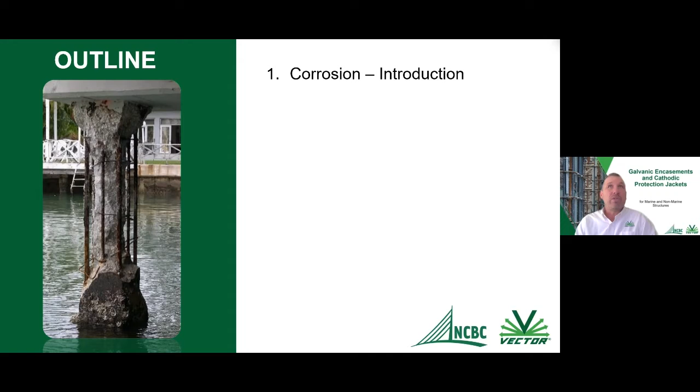So for the outline, I'm just going to do a brief introduction to corrosion, talk briefly about how it works, and why our reinforcing steel, or all the steel that we use in our structures, actually corrodes. And then I'm going to move on to some of the past solutions for pile protection, which will include a variety of different things that I'm sure a number of you have come across in the past, and how basically the majority of these solutions just did not address that corrosion problem.

Another thing that I'm going to talk about is your environmental conditions, or your exposure conditions. Depending upon which section or which part of your pile is in a certain environment, this is actually going to dictate basically what kind of corrosion, or the amount of aggressive corrosion, that you're going to have on your pile or on your structure. So everything from a submerged section all the way up to an atmospheric section - there's chlorides present there, but there's just varying different amounts of oxygen and moisture that are present as well.

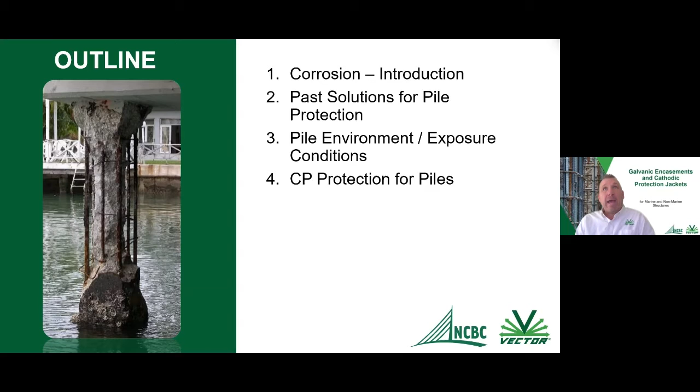Then I'm going to go into a number of the different types of cathodic protection systems that are available for all the different types of piles that are out there, everything from steel piles all the way to concrete piles. Along with this, I'm just going to talk briefly about some of the advancements or improvements for bulk anodes that are used on the underwater or submerged portion for these cathodic protection jackets.

Then this is going to bring me on to some of the sheet pile protection. So obviously we have sheet pile walls out there that typically have a coating - some of them don't have coatings on them - and we're going to go through some of the available options in terms of CP that's available for the sheet pile.

And then lastly, we're going to get into encasements in non-marine environments. So all of the areas where you basically have corrosion on your structures, but we're going to be doing an encasement on it where you actually do not have access to, or it is not in the submerged portion of a marine environment as well. So I'm going to move on here to the corrosion cycle.

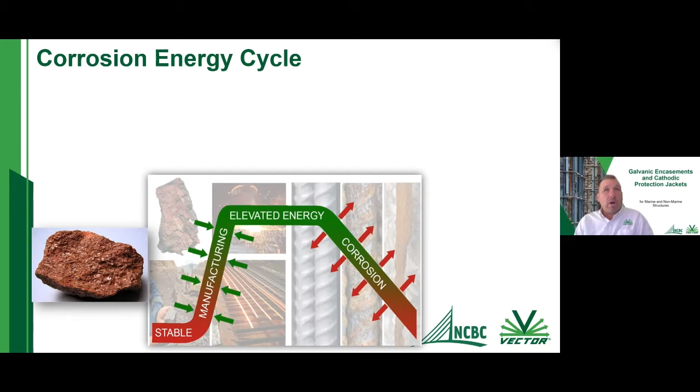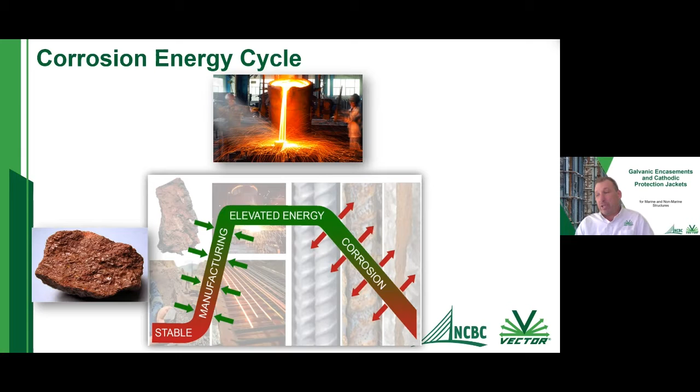This is a good slide because it demonstrates why reinforcing steel in our structures actually wants to corrode. In the beginning, we get iron ore out of the ground - it's super stable there. We mine it and pull it out because we want to make iron out of it. To do this, we push a huge amount of energy into the iron ore, basically elevating it into a material, into iron. Then we take this iron and put it into our structures, whether embedded in concrete or as exposed steel. But all this iron wants to do is go back to the original form it was in the ground - it just wants to go back to rust. So this is the corrosion process happening within our structures.

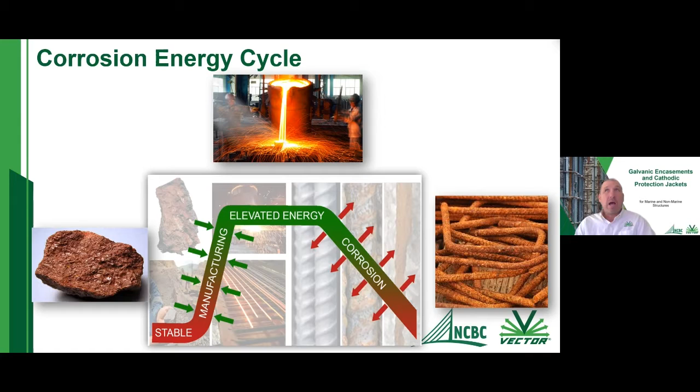I'm going to go through a brief slide on the corrosion process of steel in reinforced concrete. This corrosion process is an electrochemical reaction, and it requires a number of things to occur.

A good way to remember this is ACME. A stands for anode, or the section loss - this is the area where we actually have the rusting or corrosion of our reinforcing steel. That's our anode portion, the portion corroding. You can see it on the right side of the slide.

For the letter C, we need our cathode - this is the area that is not going to corrode, or is essentially protected. You can also see it here on the right side.

We have our cathode and our anode, but now we have to have basically a metallic path, a metal. If you look here, you can see there's a number of bars and stirrups, and there will be tie wires. You have to have this metal or metallic path to complete the circuit between the cathode and the anode - it has to be electrically connected. So that's what we have there.

Lastly, we have E, which is our electrolyte. The electrolyte is basically just the medium in which our reinforcing steel is embedded. In this example, our rebar is embedded in concrete, so the concrete is our electrolyte. If you had a steel tank buried in soil, the soil would be your electrolyte, and the same goes for seawater - if you put sheet pile or a concrete reinforced pile in water, the water becomes your electrolyte as well.

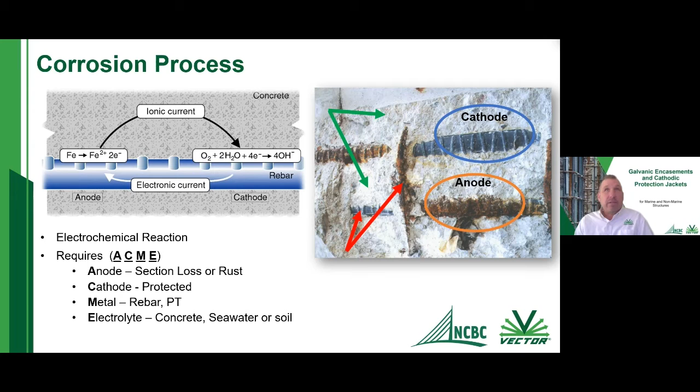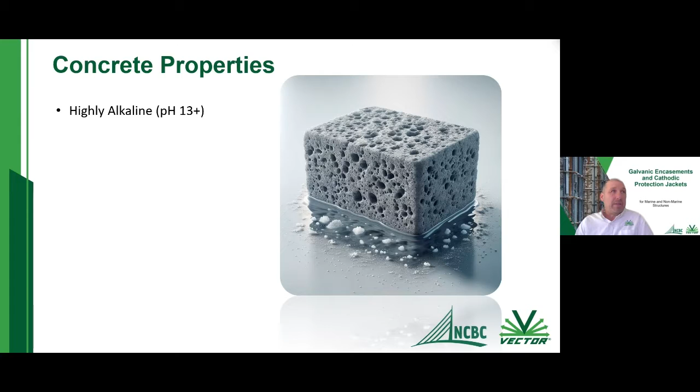Moving on, everybody's fairly familiar with concrete properties, but it's very high in pH. When we first pour or build a structure, the concrete has a very high pH. Then as it gets exposed to the environment, the pH can decrease. It's also very hard, but also very porous - if you pour water or any liquid on concrete, you can see it getting soaked up into the concrete. It's great in compression but poor in tension, and because of that, it requires reinforcement. That's the whole reason we put rebar or any reinforcement into our concrete - because of that poor tension.

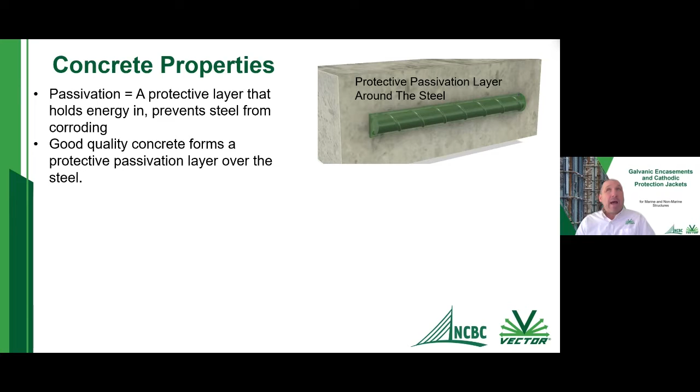So good quality concrete, you basically get a good protective layer or passivation layer around your reinforcing steel. And now what ends up happening is actually over time, this protective layer can be disrupted or taken away. There's a number of different things that do it, but in our type of work, it's typically carbon dioxide or CO2, or chlorides.

So especially in a marine environment, you can get chlorides, or for an old structure, it can become carbonated over time if it's very old. But basically both of these will break down that passive oxide layer, and it's going to allow your reinforcing steel to start to corrode.

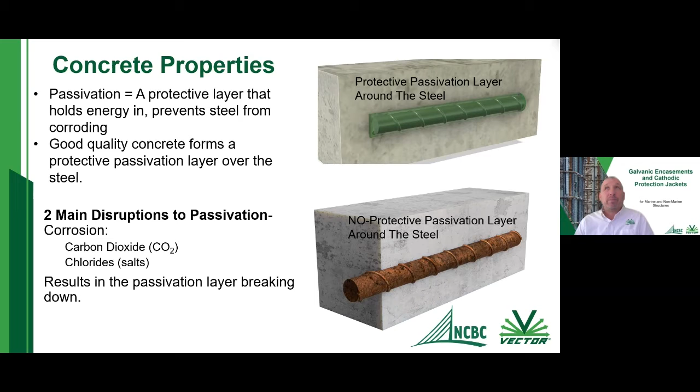So now I'm going to move on to one of the other things I want to briefly talk about, which is brackish water and corrosion. In a marine environment, you can be exposed to brackish water, and the brackish water may not have very high levels of chlorides in it. It may just have some moderate levels, nothing near the point that would cause a huge corrosion issue for exposed steel.

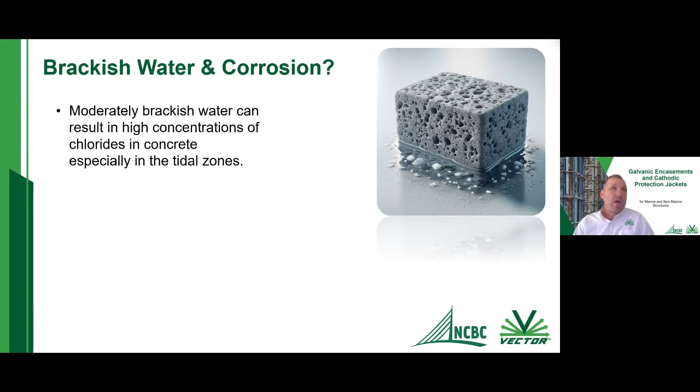But what ends up happening is, because the concrete is very porous, this brackish water basically goes in and out of the concrete surface, and due to this repeated wetting and drying cycle, the chlorides remain in the concrete. So when it dries again and re-wets, you can actually have very, very high elevated levels of chlorides in your concrete, even in brackish water where you don't have very high salt concentrations.

So some of you may have come across this, where you're out in a brackish water area where there's not a lot of chlorides in the water, but you can still see significant corrosion, especially on reinforced concrete structures, due to the concrete basically absorbing that water over and over.

So chloride-induced corrosion, here's a few pictures of them. Obviously it breaks up that passive oxide layer, like I mentioned. There's a number of areas or sources for these chlorides. Obviously the marine environment that we're going to be talking about here is a big one for us, and there's a number of other areas you can get chlorides from as well.

So one of the things to think about is chlorides are never actually consumed in this process, so they're always there to continue that corrosion process or corrosion cycle. They never get consumed, so they're always there regardless.

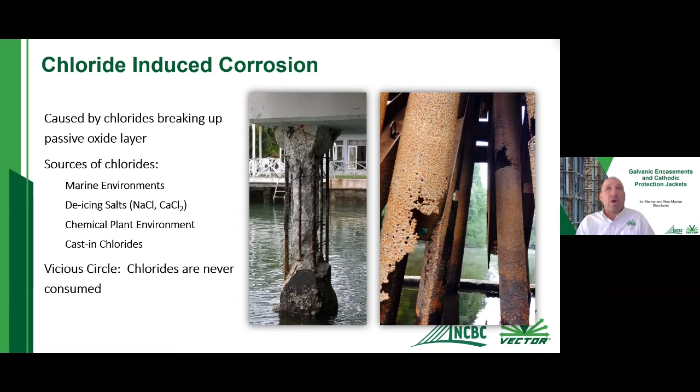The next thing I'm going to move on to is pile exposure conditions. I mentioned this in the introduction, and it's going to dictate basically what type of cathodic protection system you're going to use on the structure.

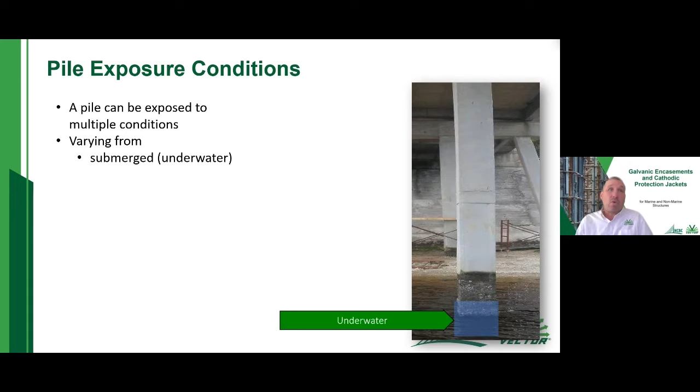So a pile can be exposed to a variety of different environments, and they can vary anywhere from our submerged or underwater section all the way up to our tidal zone, or our regular wetting zone. This is where you have your tides constantly going up and down multiple times during the day, so your structure's getting wet and dry at the same time.

And then we're going to move up into our periodic, or kind of our splash zone. So this is either storm events, wind, or it could also be boat traffic. So this area here also receives fairly significant wetting and so forth as well.

And then from this, we're going to move up onto the pile, into our dry area or atmospheric area. This is the area where, especially if you go to a beach, you can see waves crashing and basically a mist of chlorides floating in the air. This is the part of the structure that actually gets exposed to this as well.

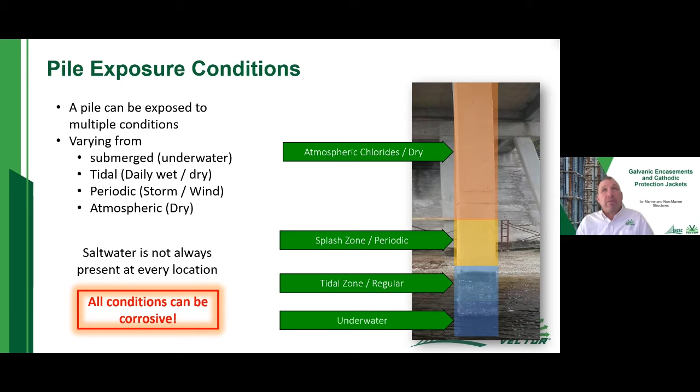So one of the things to think of is even though the pile is not exposed directly to water, it still can experience corrosion even higher up on these dry or atmospheric areas. So basically everywhere on this pile, corrosion can occur. The most extreme portions are going to be the tidal zone and that splash zone right in the middle of the pile, where you have a lot of chlorides and it's wet all of the time.

So now I'm going to just move on to some of the past strategies that have been used to basically prevent corrosion from occurring on steel piles, or to extend their lifespan. So the first one is uncoated steel, right?

So you have a certain thickness of steel, and you know it's going to corrode. Whether it's pipe piles or sheet pile walls, if it's just uncoated steel left exposed to the elements, it's going to corrode.

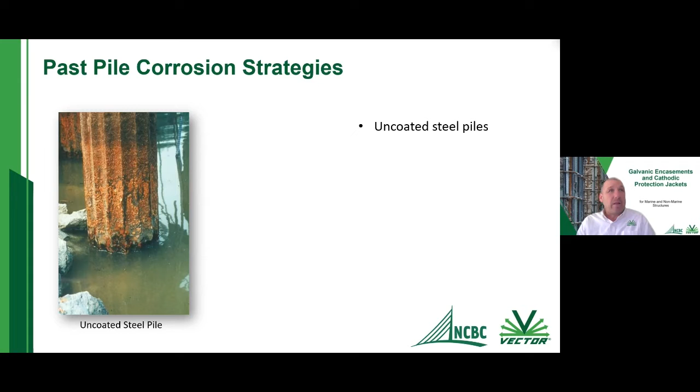Then there's coated steel piles as well, so you can put coatings on your steel piles or sheet pile walls. But what ends up happening is you get coating failures, whether from holidays in the coating application or during installation, since the sheet pile or pipe piles can be damaged through driving operations and just bringing them out to site. So you get these coating failures, and then corrosion occurs.

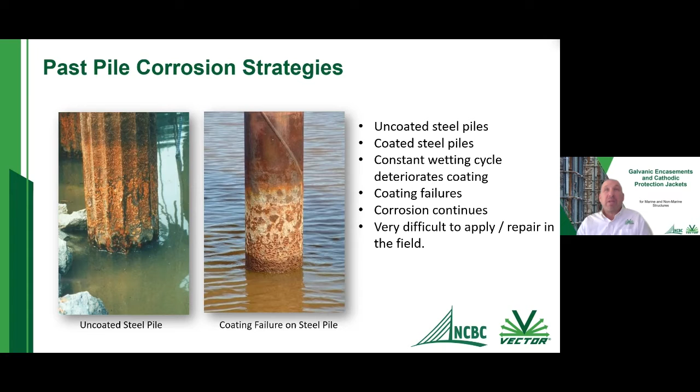So you have corrosion occurring, and this type of corrosion is very difficult to repair. How do you come in and repair this coating? You'd have to come in with some sort of cofferdam or wrap, and you still have all the salt water and chlorides available for corrosion to occur.

Another one is the fiberglass jacket. It's a fiberglass jacket placed around a pile, filled with an epoxy grout. The hope is that with the fiberglass jacket and epoxy grout, you'd reduce the amount of chlorides and oxygen getting to that portion of the pile. But what ends up happening is moisture is still present, chlorides are still in there, and corrosion actually occurs behind that jacket. It's very difficult to see any damage behind it until it gets extremely bad.

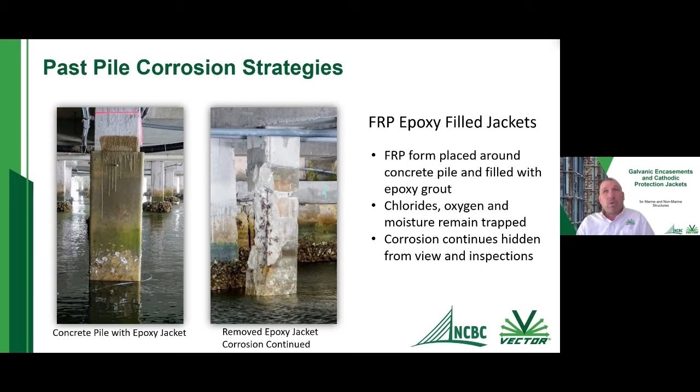And the bad thing about it is corrosion continues behind this jacket, and it's not visible when you come out to do an inspection. It can be fairly aggressive behind there before you actually see any sort of damage or delaminations to this fiberglass jacket as well.

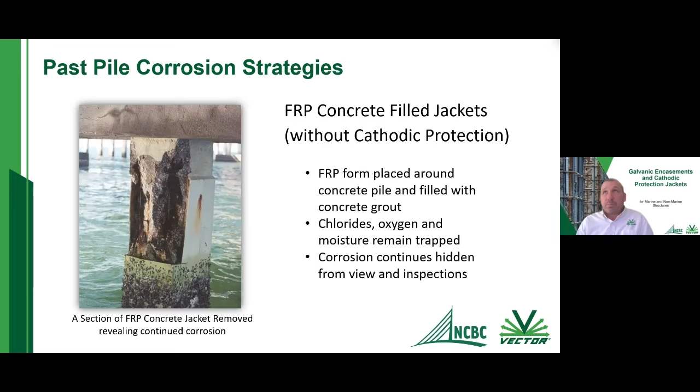So jacketing is obviously the most common repair strategy that we come across when we're out there. I showed you just a few of these here, some of the past kind of jackets that were done without any sort of cathodic protection.

There have been a number of studies done on concrete jackets placed around piles, and they found that corrosion still occurs behind these jacket systems without cathodic protection. So a number of owners, entities, and states have now included in any jacket or jacketing overbuild situation a requirement for cathodic protection, since this corrosion continues otherwise.

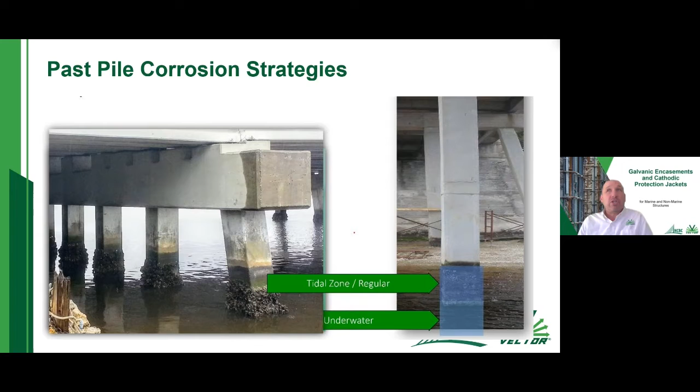With that, a cathodic protection jacket system was developed for the underwater portion, or this tidal zone portion I talked about on the previous slides. We have a lot of salt water, so we have a lot of low resistivity in here. It's very, very easy for corrosion to occur, and once it happens, it continues at a high rate as well.

One of the CP jackets that was actually developed, Florida DOT in the 90s developed an expanded zinc mesh jacket that was placed inside of a standard fiberglass stay-in-place form. This zinc mesh is attached to the inside of the fiberglass jacket, and it has an open bottom, so it allows water to go up inside of this jacket.

Along with this expanded mesh jacket, there's also a zinc hull anode that was attached to the underside of the jacket, approximately 2 feet below the bottom of this jacket. This hull anode was designed to protect that submerged portion of the pile below the seawater line.

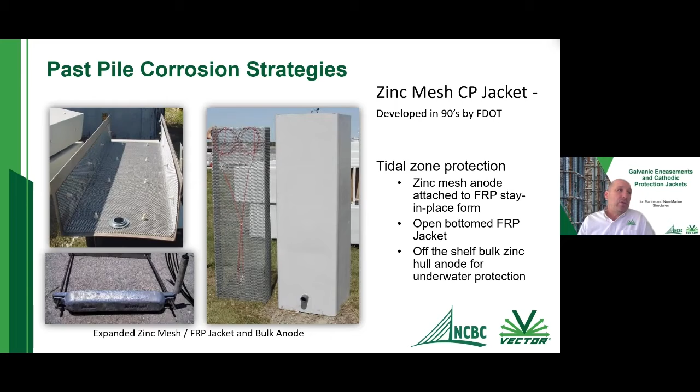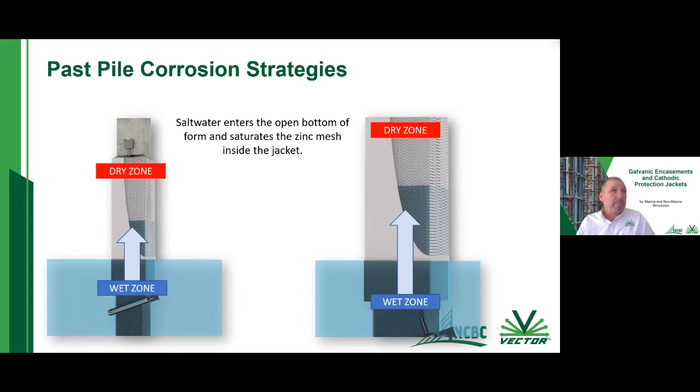Here's a detail of how it works. We have our wet zone and our underwater zone, and what ends up happening is some of the water enters the bottom of this jacket, and this salt water saturates the zinc mesh, activating it and providing corrosion protection, or cathodic protection, to our reinforcing steel within this jacketed area. Only the areas where salt water has entered the bottom of the jacket will get cathodic protection.

As you move up higher on the dry zone, the salt water is not available anymore, so the zinc starts to passivate. There are a couple of slides coming up that I'll talk about this. As mentioned, the hull anode placed underneath the jacket is going to provide cathodic protection to everything in the water zone.

So we have our electrolyte that we talked about before. We're going to use our salt water here as our electrolyte, and this bulk anode is going to protect the pile in our submerged zone.

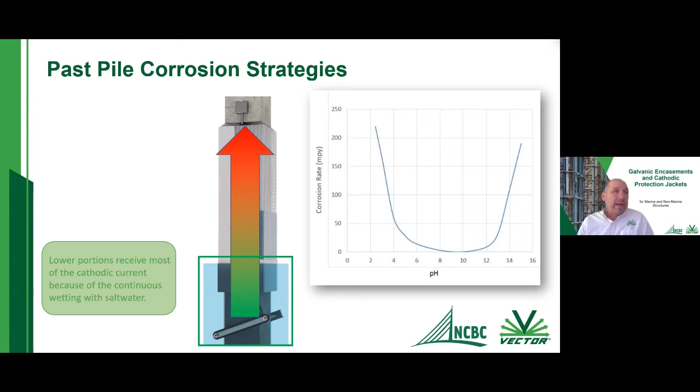Now moving on to our underwater area, or submerged zone - we get some salt water moving up into our zinc mesh here. As you move higher and higher on the elevation of the zinc mesh, you get less and less activation of our zinc.

The reason for this, if you look on the right side, we have our corrosion rate versus pH. Once your concrete pile starts to see corrosion occurring, you're probably going to have a pH of around 11 or 12 in there. Zinc, when embedded in concrete, only starts to corrode in either a very, very high pH environment or a very, very low pH environment.

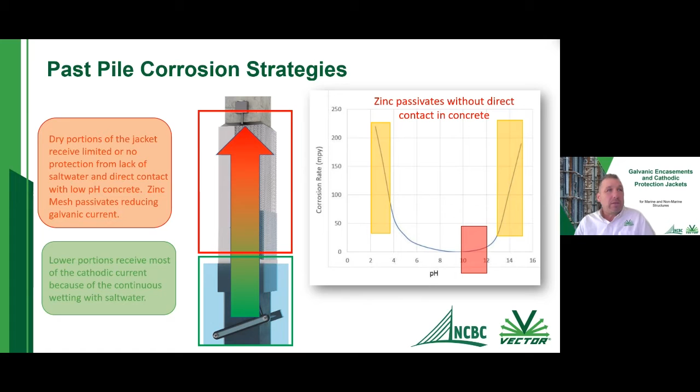So when we have our zinc embedded in this concrete, the zinc does not want to corrode, and that's why we're relying on that salt water - we're relying only on that salt water to activate the zinc in this case.

So what can we do to increase this activation zone, or increase this tidal or splash zone? The zinc mesh is very effective in the smaller zone down at the water line or in that tidal zone, but what can we do to activate the elevated portions of our jacket to keep the zinc in a corroding state?

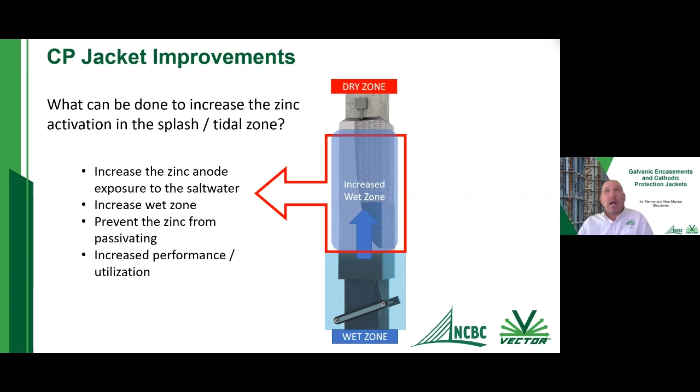Can we increase the exposure to salt water, increase this wetting zone? If we can do that, we're going to stop the zinc from passivating, and by doing that we're going to increase the performance of this jacket and elevate the area of our cathodic protection.

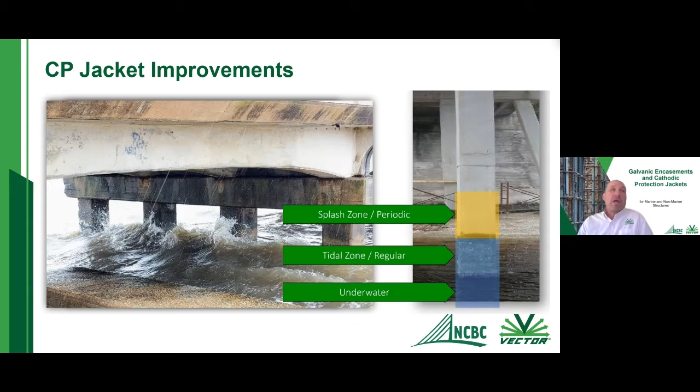So some improvements have been made to the zinc mesh jackets to allow it to not only protect everything in the tidal zone and underwater zone, but to move up into that periodic zone - storm events, boat traffic, periodic splash zone. So instead of a tidal jacket, it's a tidal plus jacket.

Basically what we have is the concrete, and an anode that's going to be embedded in the concrete.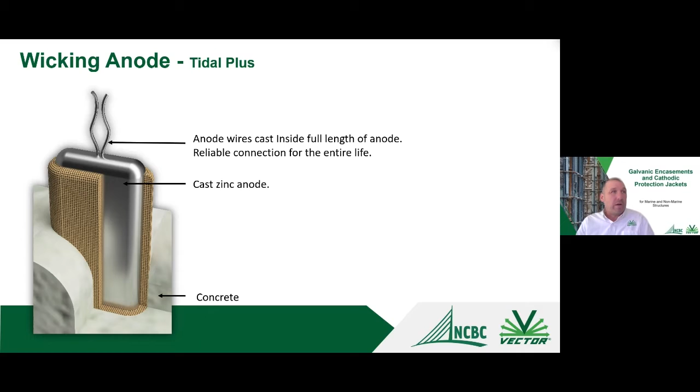It's a very similar system: a cast zinc anode, similar to the expanded zinc anode, except this is just a larger bar of zinc. Then there's a wicking fabric placed around it. This wicking fabric allows salt water to flow up and down using capillary action, which keeps the zinc always wetted with salt water and in an active state.

If you remember the pH versus corrosion rate chart, the fabric also acts as a protective barrier between the higher pH of our concrete, roughly around 11, and our zinc. We do not want the zinc in contact with the concrete within that jacket. This allows the zinc to remain in a more active state and provides a higher level of cathodic protection for the jacket.

This is a detail of how it's installed, or the parts of the system. Basically, you have a wicking fabric attached to a pile, hung on the pile. In your design you'll determine whether to use one or two per face, depending on whether it's a round pile, so you do a design to figure out how many Tidal Plus anodes are required.

There's also the stay-in-place form that's used, and we use a bulk aluminum anode for the underwater or submerged portions. Typically we were using a hull anode, but now we're also using a bulk aluminum anode designed specifically for cathodic protection on piles, not just pulling an anode off the shelf.

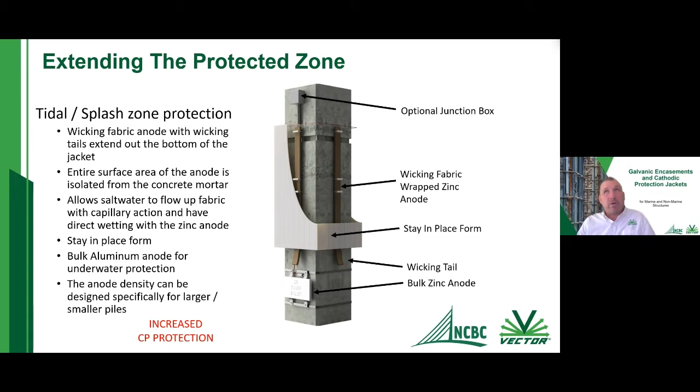With all of this, we're getting increased cathodic protection. On the next slide, I'll show you how it works and the differences here with the Tidal jacket.

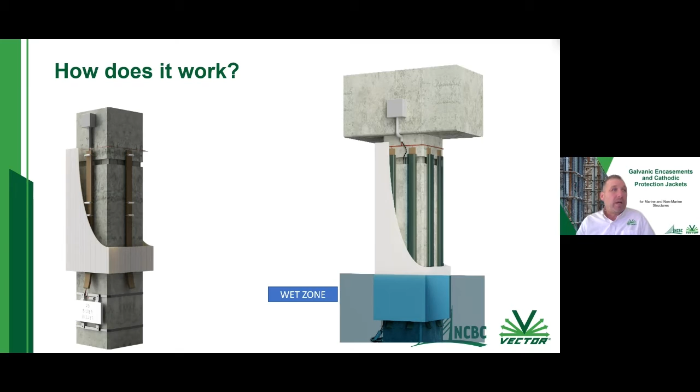For the Tidal Plus jacket, we have our wet zone down below, same as before. What happens is we have our wicking tail, sticking out the underside, in the wet zone of the pile. These wicking tails allow the salt water to wick up and go farther and higher up on these zinc bars, completely saturating them and keeping the zinc in an active state.

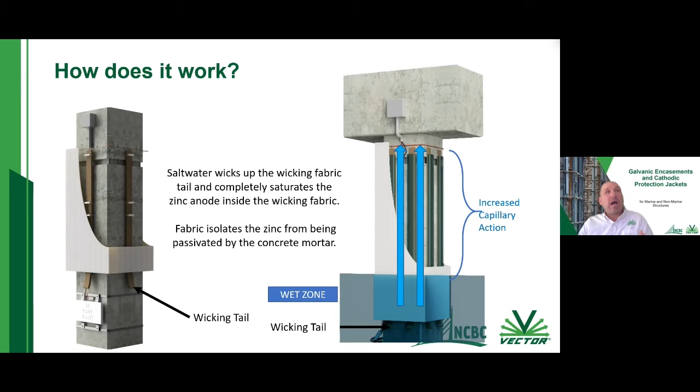The fabric also helps isolate it, stopping the zinc from actually contacting our concrete mortar and passivating that way. So what we've been able to do is bring the salt water higher up in the environment within our jacket system, and now we can actually activate the zinc higher up on this jacket system as well.

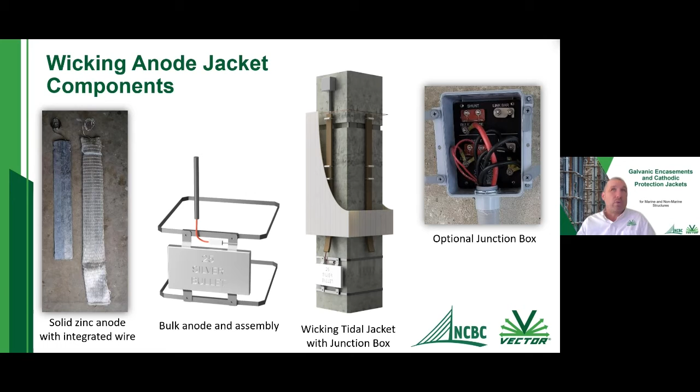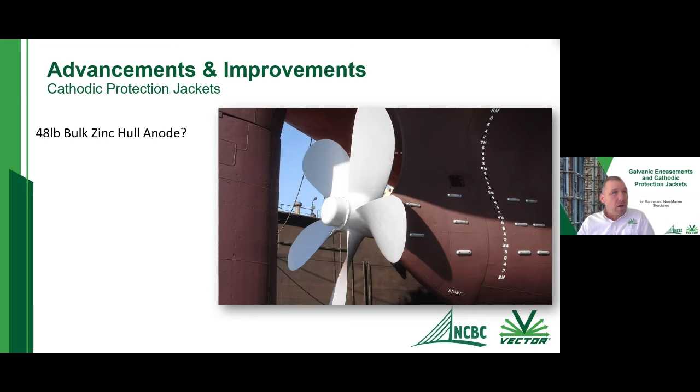As I mentioned, another advancement for the Tidal Plus was moving from a 48-pound bulk zinc hull anode. Traditionally, a bulk hull anode had been used, similar to anodes used on boat hulls before. They were thought to be used because it was a zinc anode, and they needed compatibility with the zinc mesh inside of the jacket.

Another thing is typically what had been used in the past was one hull anode used for every type of pile out there, whether it was a very large pile compared to even a 14-inch square pre-stressed pile all the way up to very large drill shaft piles that are 60 inches in diameter. One zinc hull anode was used for all of them.

And then also consider your water column. Do you only have 10 feet down to the mud line, or do you have 40 feet? The more exposed pile you have in that water column, the larger or more cathodic protection is going to be required to protect that area. So one of the things that was looked at is: is one hull anode sufficient for these larger, longer piles?

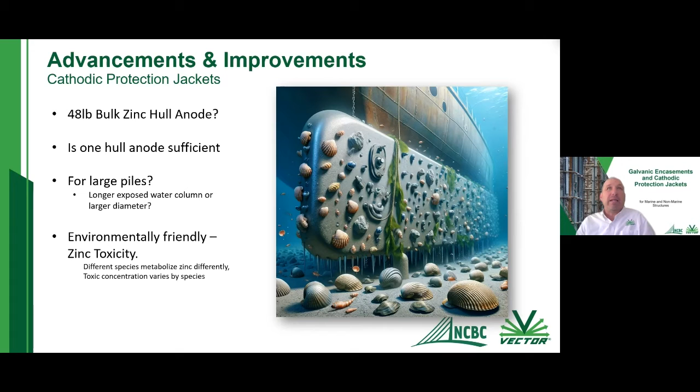Another thing becoming more predominant is zinc toxicity. If you have certain estuaries or ports with a lot of marine environment, zinc toxicity is becoming a concern, and aluminum is a much more environmentally friendly alternative to zinc.

So what ended up happening was a 25-pound bulk aluminum anode was specifically designed for pile jackets. It was a custom design, shape and size, fitting the majority, or 90%, of the piles that actually receive cathodic protection out there.

One of the worries was whether aluminum would be compatible with all of these zinc jacket systems that are out there. From all of the tests and field trials that have been done, the aluminum bulk anode is actually compatible with these systems as well.

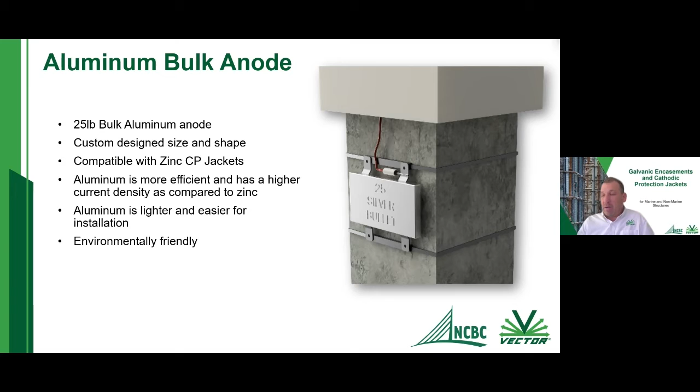Another thing is aluminum is actually more efficient. When an anode is exposed to seawater, aluminum is much more efficient and has a higher current density compared to a zinc hull anode. So we can use a smaller, lighter aluminum anode that's easier for installation, giving more cathodic protection current and a higher current density. And for instances where zinc is an environmental concern, aluminum is a much better option.

The aluminum anode was actually designed from data acquired from the field. The anode was sized for it, put in, and then the appropriate size anode was made. Like I mentioned, 25 pounds fits about 90% of the piles, which leaves another 10% of jacketed piles where it wouldn't be sufficient.

This is one of the things you need to do when doing a CP jacket design or specifications: make sure the bulk anode is part of the jacket design. If you have a very large drill shaft pile, 60 inches in diameter, going down 40 feet into the water, you're likely going to need more than one bulk anode.

So you're not only designing for how high the jacket comes out of the water, but also making sure you include the bulk anode in the design. Again, it all depends on how much of the pile is in the water column. A longer, larger pile will likely require 2 bulk anodes instead of 1.

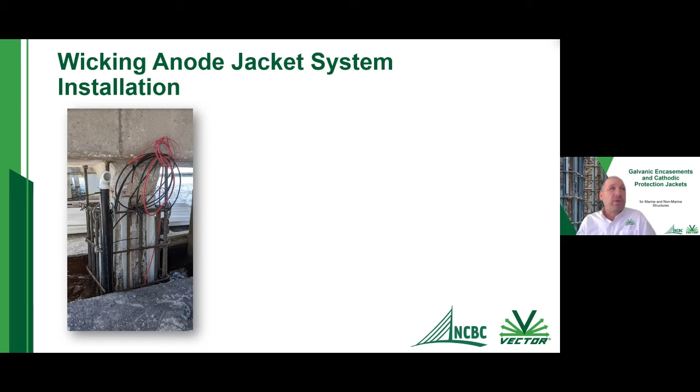They can either be filled by tremie method using pump tubes like this, basically filling from the bottom up, and they have certain ports in there that break away as the pressure increases. Or you can use traditional pumping ports on the outside of the jacket that are typically staggered at 4 feet on opposite faces of the jacket.

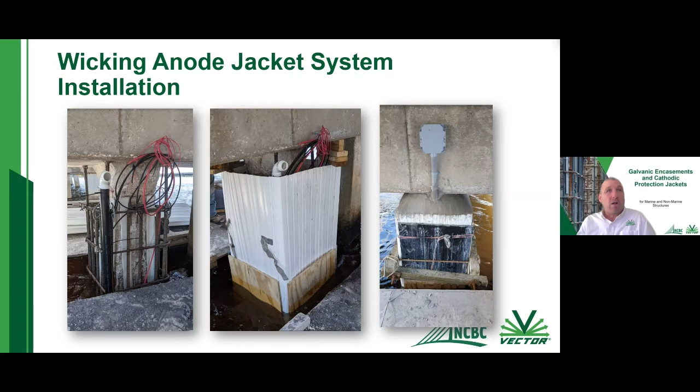So the jacket's just being placed around, some temporary shoring and bracing is being put on it, and then it was poured. The junction box here on the right side, you can see the junction box has been installed and all the wires have been run into the junction box.

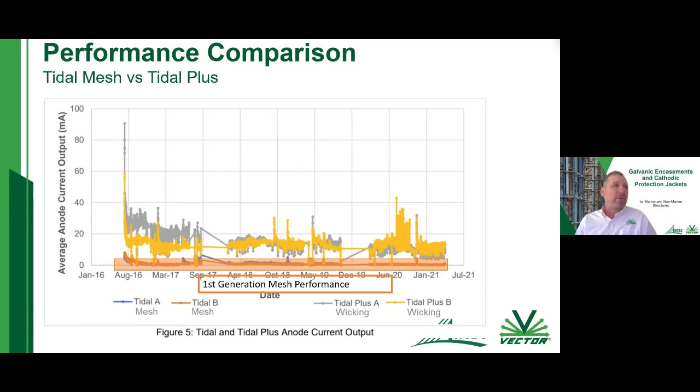So in terms of performance, I mentioned that we are getting a performance jump with the Tidal Plus versus the Tidal jacket. You can see here that the Tidal jacket, or the first generation mesh jacket, we're getting a few milliamps of current coming out of the jacket versus what we are seeing here with the Tidal Plus. So we're getting a significant improvement in performance, or in cathodic protection output. And not only are we getting an increase in performance in just the tidal zone, but we're also able to extend that cathodic protection zone much higher up on the pile than just the typical tidal jackets.

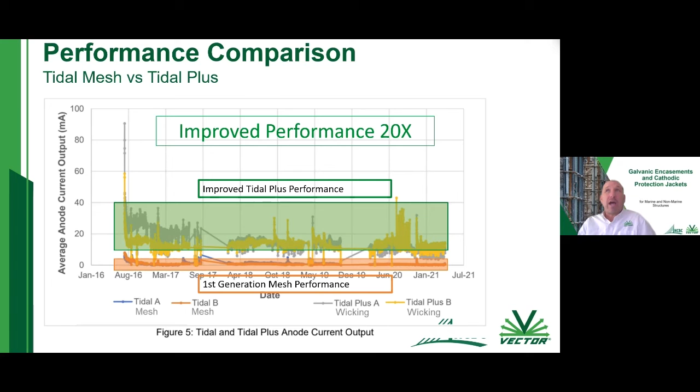So now I'm going to move on to what happens when we move up into this atmospheric area. All the previous areas I was talking about, we actually have access to salt water. So we were relying on that salt water, using it in both the Tidal and the Tidal Plus jacket systems to activate the zinc. If you remember, if we embed zinc in concrete, the concrete does not have a high enough pH to keep the zinc actively corroding, so we had to rely on the salt water to keep it active. But now when we move up to this atmospheric area, or the dry area, we do not have access to that salt water.

Without that salt water, we're going to have to rely on something else besides the salt water that's in the environment. So this is that corrosion rate versus pH graph again as well.

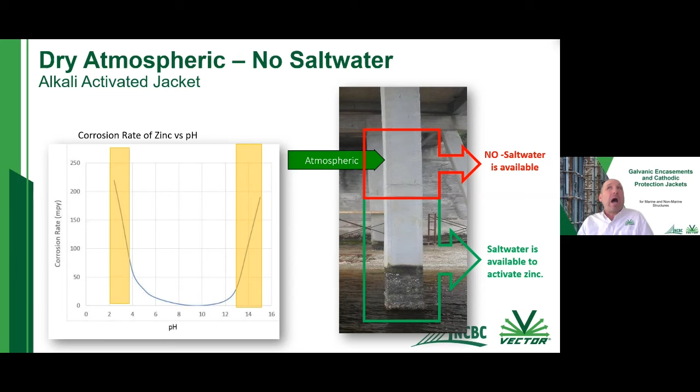If we look at the corrosion rate of zinc, we can see that zinc corrodes either in a low pH environment or in a high pH environment. So we're going to want to use a high pH environment for it, right? If you have a low pH environment, steel corrodes in it. Steel is actually protected in a high pH environment. So you're going to want to use a high pH to activate the zinc, because our corrosion rate of zinc is much higher in a higher pH, plus it's not damaging or detrimental to our reinforcing steel as well.

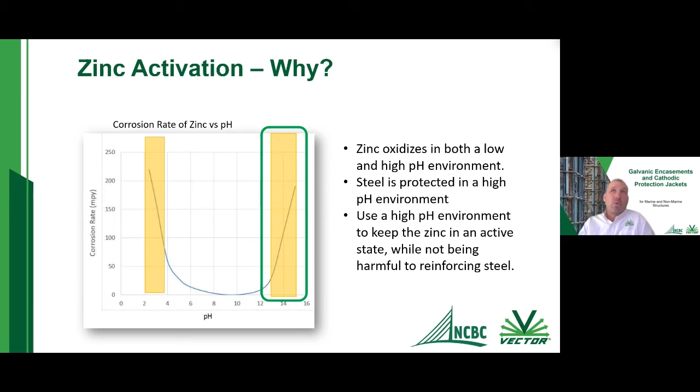So what this technology is, basically, it's very similar to the Tidal Plus jacket, but it's called a distributed anode system. It's an alkali activated jacket system, and it does not require salt water for it. It has an anode very similar to the Tidal Plus anode, but instead of being encased or surrounded by a wicking fabric, it's actually encased in an alkaline mortar.

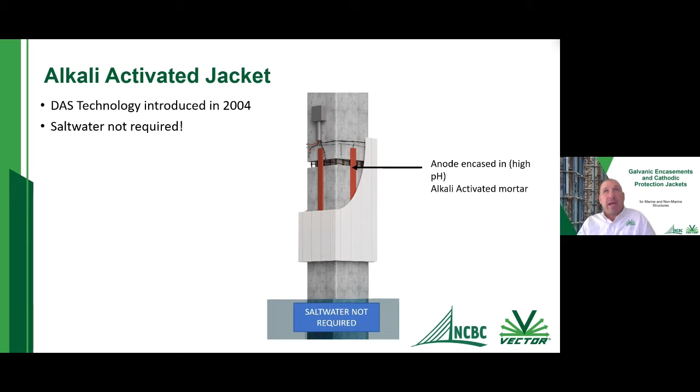So it's encased in a very, very high pH mortar, very similar to how a AA battery in any of your remotes that you would use for your TV. The zinc shell is basically encased in a high alkaline activated mortar to keep that zinc shell in an activated state. So we're doing the exact same thing here, basically embedding the zinc in a really, really high pH mortar.

And we're going to use the same stay-in-place form as well. That high alkaline mortar keeps the zinc actively corroding, and we do not need salt water for it. So this is an area where if you're looking to protect something higher up, you can install this type of an activated jacket higher up, outside of those elevations where you don't have access to the salt water for it.

So we don't need salt water as well. This can work in a saltwater environment, and it can also work in brackish water. As I mentioned before, you may end up having brackish water where it does not have high enough chlorides in it to keep zinc in an active state, but yet you still had enough chlorides within your concrete pile that you had corrosion occurring. So this is another example: you can use the activated jacket in these brackish water environments, and even in freshwater environments if for some reason you have any sort of organic corrosion or something happening where you have a corrosion problem as well.

And again, dry land, of course, and then again, if you're using this in a brackish water environment, you can use a bulk anode for protection, because you can extend this jacket down into the water.

Another option that you can do is use a combination, using this activated jacket with one of those Tidal Plus jackets as well. So you could use the Tidal Plus jacket in the salt water or in the water portion, and then as you move up higher in these elevations where you don't have access to the salt water, you can use the alkali activated jacket in these elevated portions.

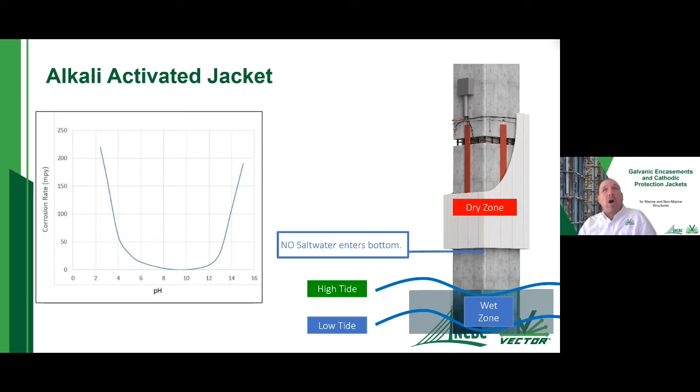So again, we have our wet zone. There is no water going into the bottom of our jacket system, and we have our alkaline mortar surrounding the anodes. So the zinc is only being activated by this mortar, not by the salt water. Again, we're relying on this high pH of this mortar to activate the zinc, and at the same time, it's not going to be detrimental to any of the reinforcing steel that we have in the jackets as well.

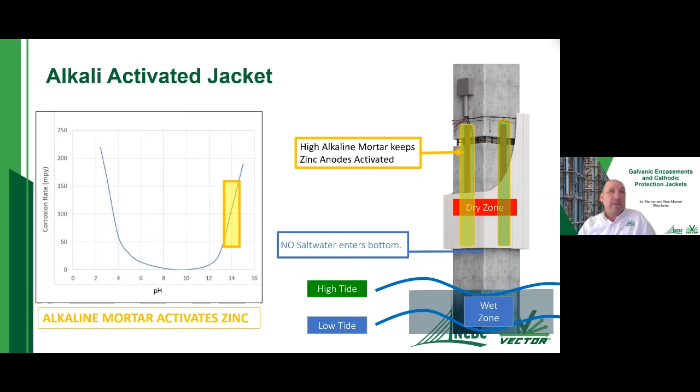Again, if you're using this in conjunction with a Tidal Plus jacket, or bringing this down to the water line, say for a brackish water environment, you'd still want to use an appropriate bulk anode if needed. So here's the structure.

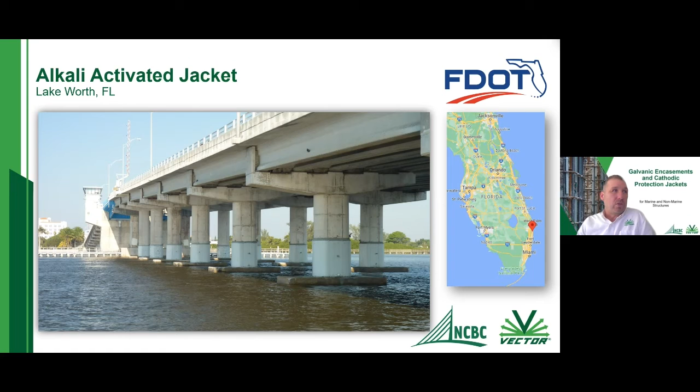So this is obviously when it was finished. You can see on the map where the structure was located. It's in the Intracoastal waters here. It's a little drawbridge. And here's just some detail of it.

So there was an additional reinforcing cage that was actually attached to it, and the anodes were going to be just placed around these columns as well. There was also welded wire fabric being used to help for confinement, and the anodes were being placed inside of here. Then the jacket was just filled with mortar.

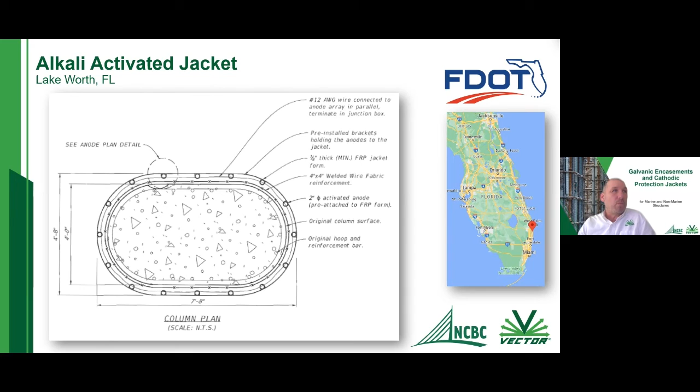So the first thing you do when you come in is remove any of the delaminated concrete. You can see here the delaminated concrete was removed, and then there's a continuity groove. That groove goes around the column - you can see it on the first column and even on the backside columns in the background. So that's our continuity groove, and it's actually being made so you can check to make sure that all of the reinforcing steel is continuous within that column.

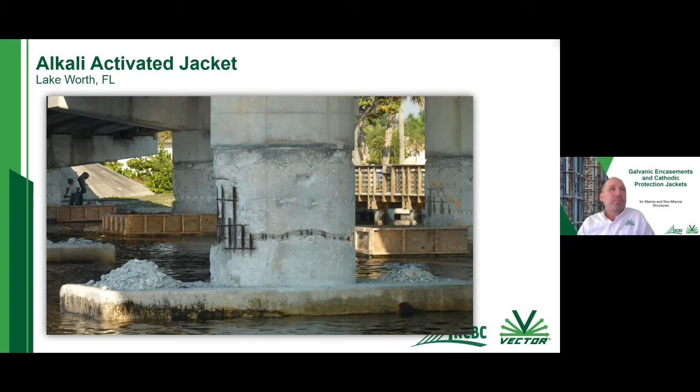If you remember back to the beginning of the presentation, we had that metallic path. We want to make sure there's a good metallic path between all of our reinforcing steel within the structure. You can see there's a small wire that was attached or welded to each piece of steel within that column, just to ensure they had good continuity or good metallic path. So again, we have our stay-in-place forms with our anodes attached.

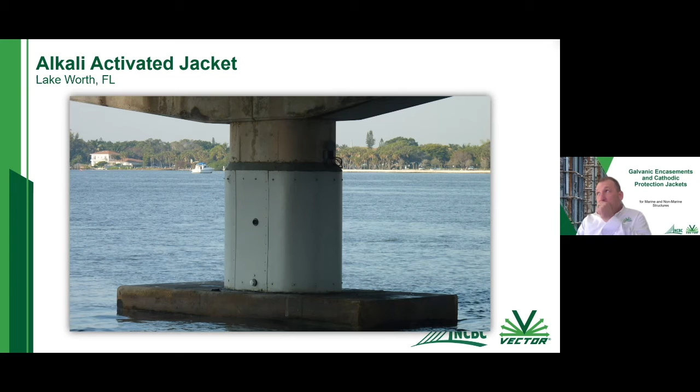So again, this is a finished picture of the pile. You can see the tide at low tide and high tide - the tide never gets up to the jackets here, so it's just being activated by the anodes within the jackets. One thing to note here as well is not only did the columns receive cathodic protection from these anodes, but those footers that the columns are sitting on were actually receiving CP from those anodes as well.

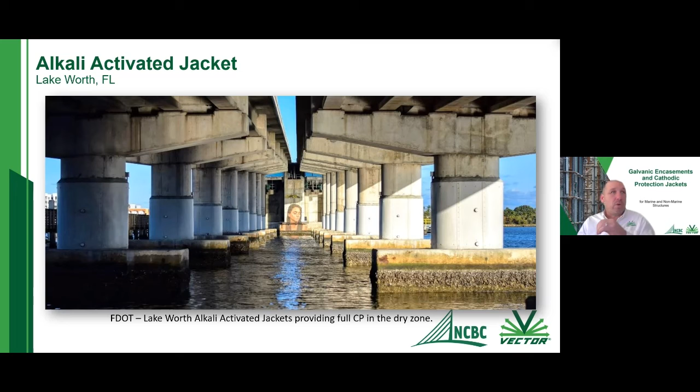So they're able to pass a huge amount of cathodic protection, or CP, very similar to a powered system in this case. These were all jacket systems, basically for bridges or structures that were within a marine environment as well. And I'm going to move now to talk a little bit about steel structures in a marine environment.

This is also a very aggressive area for corrosion. You want to make sure you have a coating here, because if you have a good quality coating, you're going to require fewer anodes. So even from day one, when this sheet pile is installed, you want to make sure there's a good quality coating on it, drive the piles, and then you're going to want to make sure you also design and install a galvanic cathodic protection system for that submerged zone.

It's a very aggressive environment. There's going to be holidays, chips, all that sort of stuff from driving the piles. You're going to want to install bulk anodes on it right from the beginning, right when it's new, and it's going to extend that service life of that sheet pile wall tremendously.

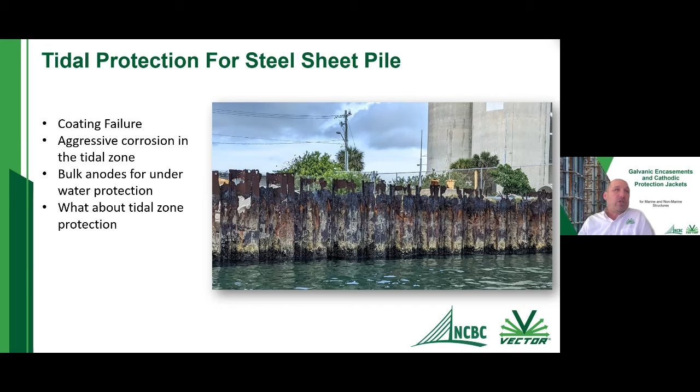Now what ends up happening is you have this tidal zone that's above the bulk anodes, and it's a very, very difficult area to protect. So you get a lot of coating failures in this part or area, as I showed you in the previous picture. So what can you do to actually rectify this situation once your coating starts to fail and you have corrosion occurring? What can we do to rectify this or help prevent it from getting to that situation? One of the things you can do is there's a jacket system for sheet pile.

It works basically exactly the same way as the tidal plus jacket systems worked in the previous slides I showed you. So we have our tidal zone here. You're just going to have a standard fiberglass form that's going to be molded or made to fit the geometry of your sheet pile wall. And then you're going to throw in some anodes within this stay-in-place form. So this is the tidal plus anode. It's going to rely on that wicking technology, making sure to bring the salt water up to keep that anode in an active state.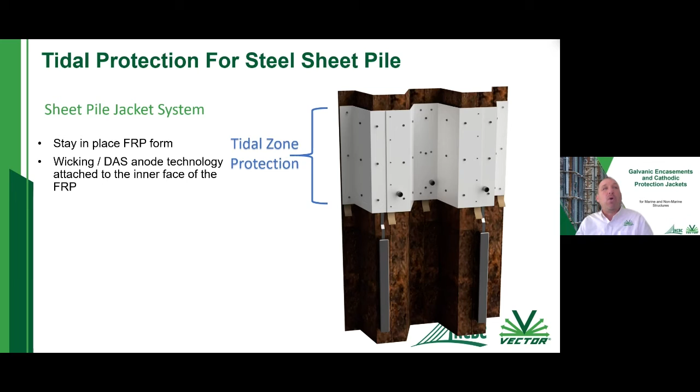And then everything below that jacket, you're going to want to put an anode on it. In this case, the anodes were actually attached up in the jacketed zone. This just saved the contractor from having to use divers to weld the anodes on. But anodes can also be welded on traditionally, like I'd shown you in the previous photograph, just regular bulk anodes welded to the sheet pile wall. So the bulk anodes protect everything below the water line, and the jacket system protects that tidal zone, that really aggressive zone as well.

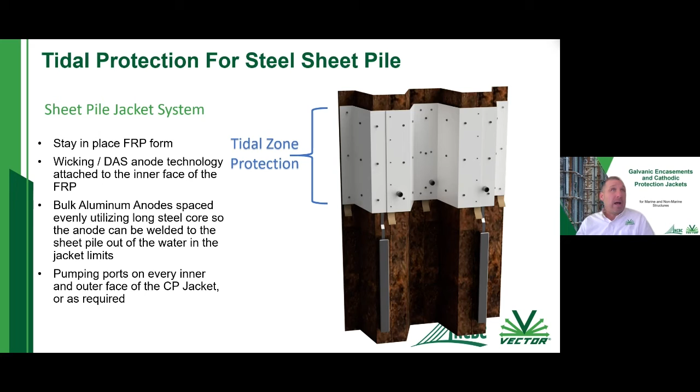So this is basically everything here for a marine environment, and I'm going to move on now to encasements. This is for things that are not in a marine environment. It's going to use very similar anodes that were used in these jacket encasements or these CP jackets. So you can think of this as just a very large atmospheric jacket that's going to be used in an area where it's a non-marine environment.

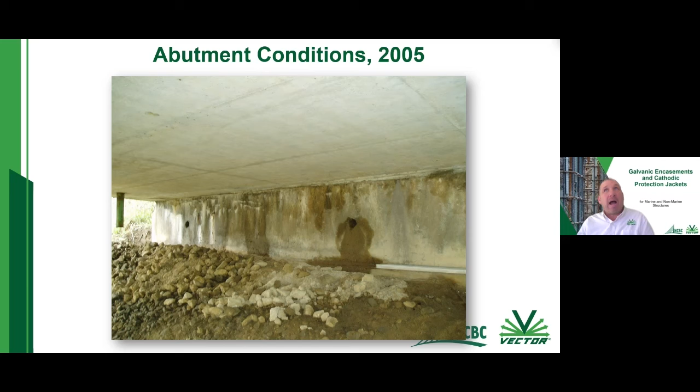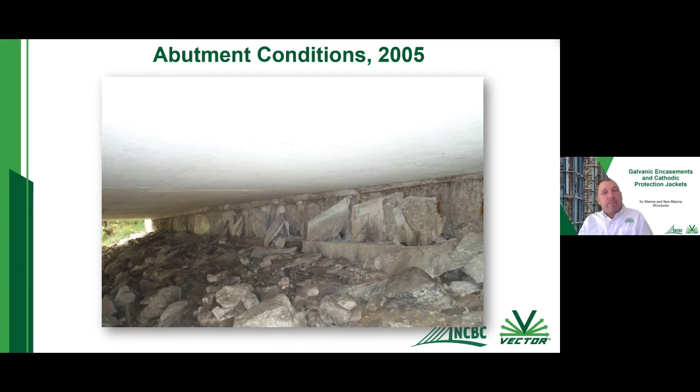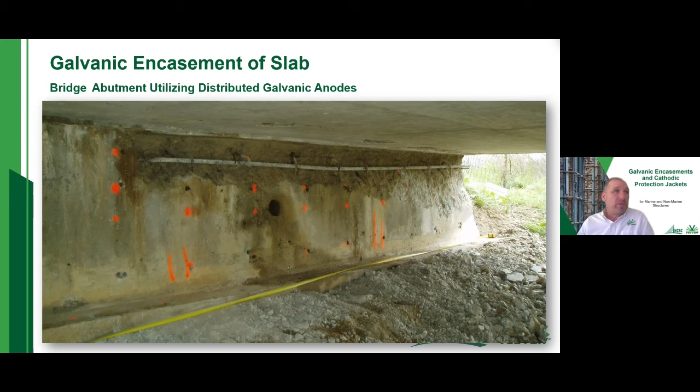So those were all the areas where delaminated concrete was removed. They came in and added some new steel. In this case, they actually used epoxy coated steel. So they came in and added new reinforcing steel.

You're going to want to make sure that this epoxy coated bar is continuous, or that it has a metallic path to your original steel. We want those anodes that you see installed there to protect the epoxy coated steel and the reinforcing steel within the original abutment as well.

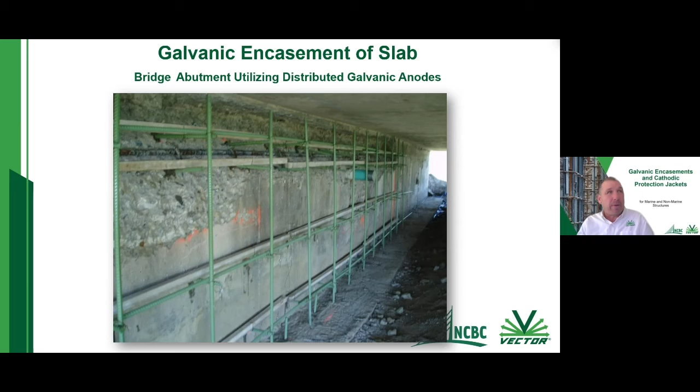So then they came in and put their formwork up, and you can see there's a junction box here. That's how we're able to get all the readings from these anodes. We have all of the anode wires running up to that junction box, and we also have the cathode wires, or the reinforcing steel wires, running up to that box, both from the epoxy coated bar external cage and the original reinforcing steel. And it comes up there.

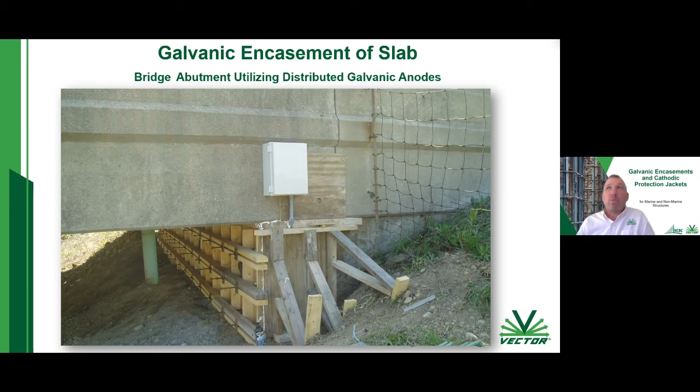So it's a galvanic system that does not require power, so you don't have to have any sort of external rectifiers, external power source system, and it is not susceptible nearly as much to lightning like some of the impressed current systems are as well.

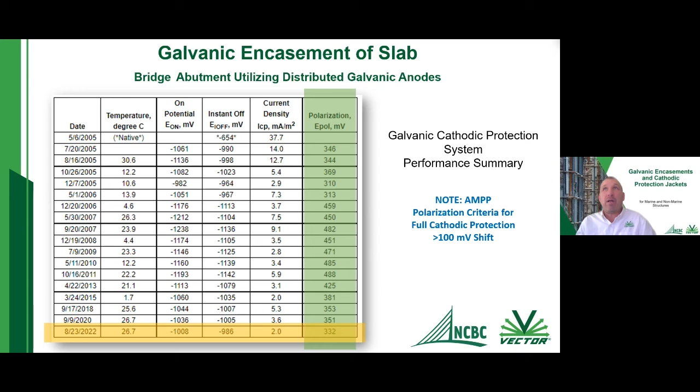And so this brings me into the conclusion. Again, for all of the areas within a pile, if you have corrosion occurring on a pile, what you're going to want to do is look at the environment. What environment is this pile in? Can we use salt water?

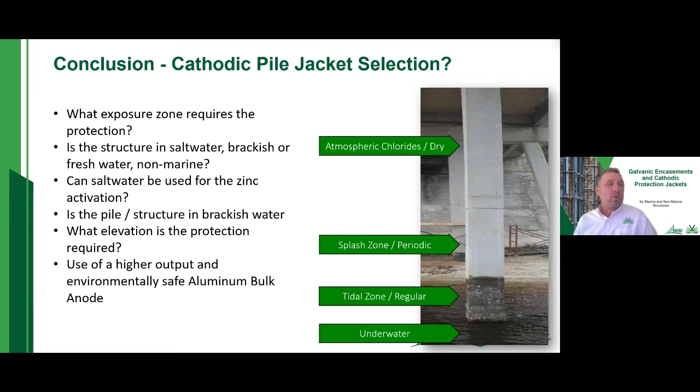If you can use salt water in this environment, you're going to use a Tidal Plus jacket. It's going to rely on the salt water to activate the zinc. As you move higher up, you're going to have to go to an activated system because you don't have the salt water available. And everything under the water, we're using aluminum bulk anodes for it as well.

So again, just a brief summary of the jacket systems. You have an expanded zinc mesh that is good in the tidal zone, with wicking allowing the activation to be brought up to a much higher level with the salt water. Then you go over to the activated, or alkali activated anodes, that do not require any salt water as well. So very similar to that abutment project that I just showed you.

So, and that basically ends it. I think I ended up just on time for it as well.